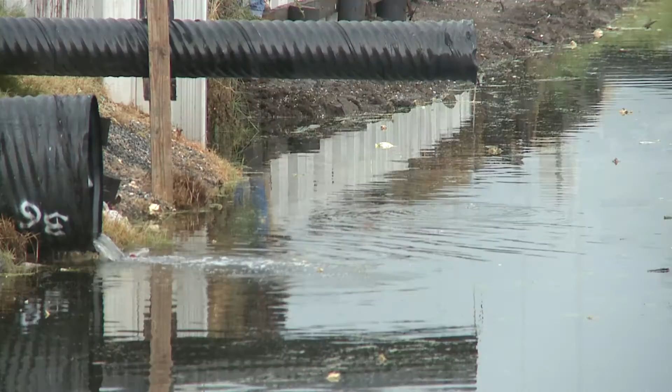This video is intended to give voters a brief history of how the 1-cent sales tax has been beneficial to Jefferson Parish over the years, how it's allowed for capital improvement projects throughout the parish, and how it's helped fund the sheriff's office. It will also take you through the projects that are proposed and have been unanimously approved by vote of the parish council if the initiative passes on December 10th.

Again, this is not a new tax, but an extension of an existing tax for 20 years. The 1-cent sales tax is authorized on the sale of retail and services. It is not applicable to food purchases or medical expenses. 1/8 is dedicated to the sheriff's office. The remaining 7/8 is dedicated to roadwork, drainage, and sewerage projects.

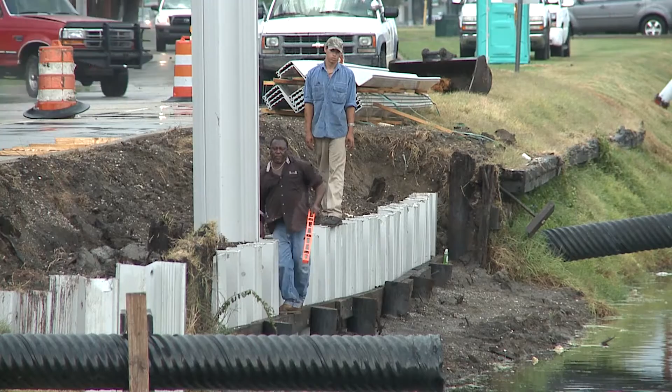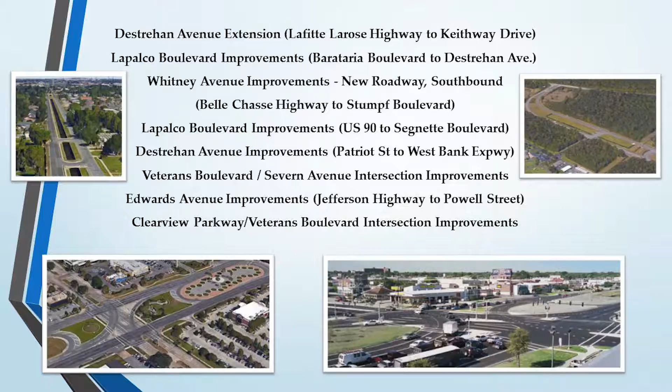The parish undertook a similar course of action in 1998, bonding the parish's sales tax percentage to generate $260 million, which was supplemented by approximately $35 million of state and federal funds. This helped complete the construction of 89 roadway and drainage improvement projects that have significantly improved traffic flow and reduced flooding parish-wide.

You're probably very familiar with many of the projects from the 1998 renewal seen here, which have added value to Jefferson Parish. The proposed 2016 Road Bond Initiative will allow the parish to improve access to businesses, shopping, and recreational facilities. The parish will maximize the $190 million in bond funds by supplementing it with approximately $106 million in state and federal funds. The remainder of this video will take you through these projects, which have been unanimously approved by vote of the parish council.

As one of only 3 north-south highways that extend from the lake to the river, Causeway Boulevard handles approximately 62,000 vehicles every day. As part of the bond program, an interchange with Earhart Boulevard on the west side of Causeway will be undertaken, providing improved access to and from Elmwood and the Huey P. Long Bridge. In addition, major rehabilitation of the existing Airline Drive overpass, including the traffic circle, will be undertaken to extend the life of this aging structure.

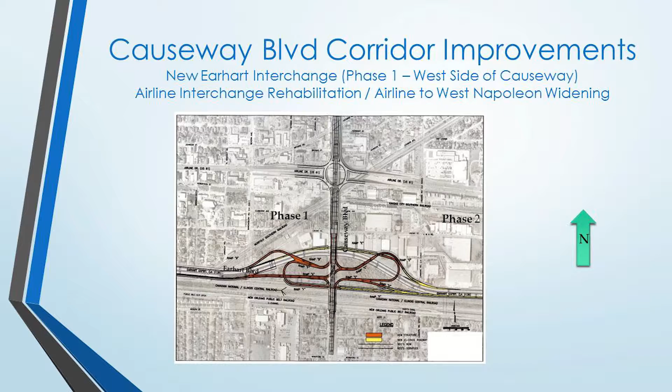Causeway Boulevard will also be widened from 4 to 6 lanes between Airline Drive and West Napoleon Avenue to reduce congestion and travel time delays.

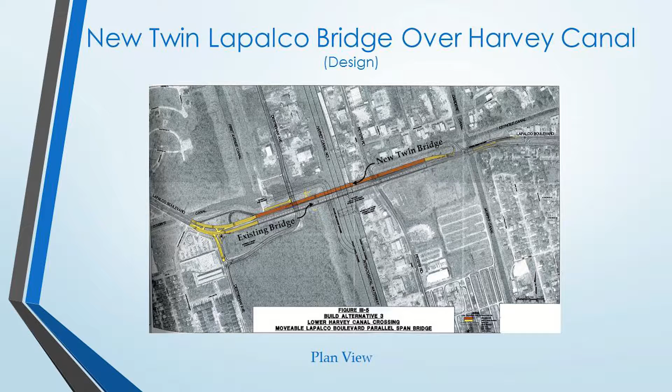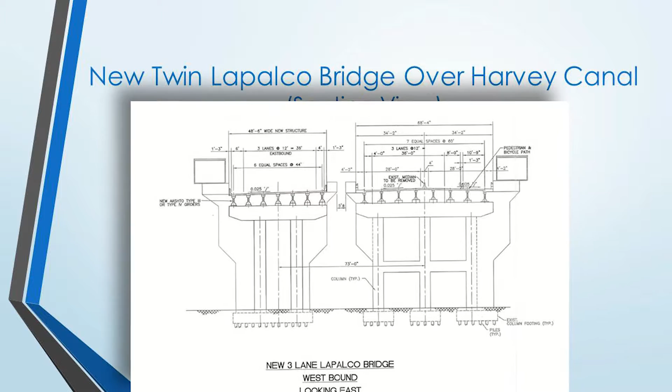Currently, Lapalco Boulevard carries 39,000 vehicles per day and is choked down from 6 lanes to 4 lanes at the Harvey Canal Bridge. A new twin bridge located immediately north of the existing bridge will be designed under the bond program. This major improvement will provide 3 westbound traffic lanes, and the existing bridge will be converted to 3 eastbound lanes with a much-needed 10-foot wide shared use path for pedestrians and bicyclists to safely cross the canal.

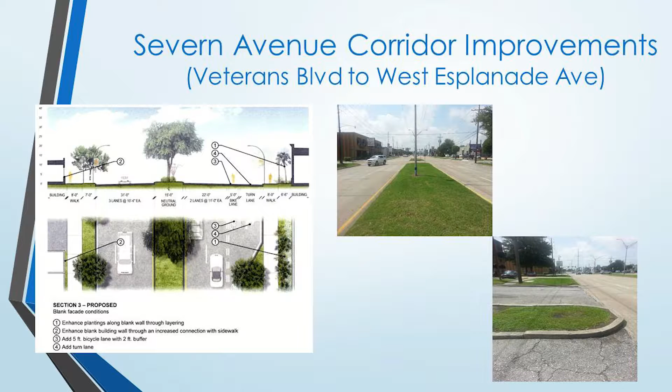Severn Avenue is the gateway to Fat City and the largest retail shopping complex in Louisiana, Lakeside Mall. Improvements between Veterans Boulevard and West Esplanade will include new, wider decorative sidewalks, pedestrian lighting, landscaping, and a bike lane to connect Fat City to Lake Pontchartrain. In addition, several pocket parks will be constructed, providing areas along the corridor for shoppers to relax and enjoy the surroundings. This will attract more people to the area and continue the positive redevelopment of Fat City.

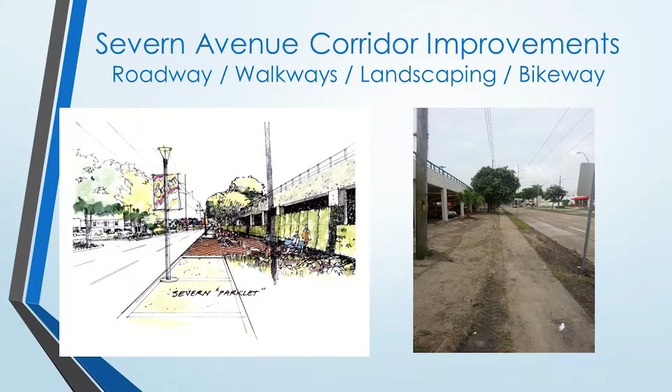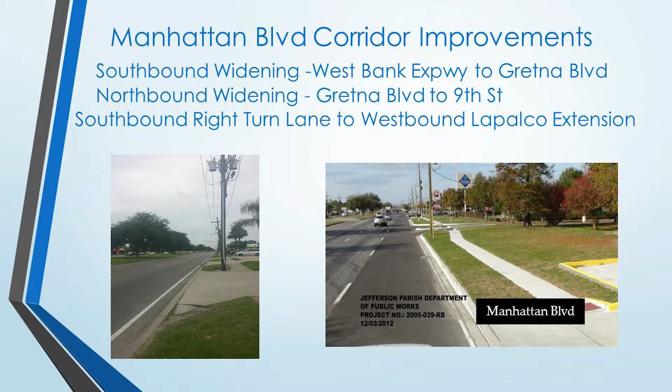Manhattan Boulevard is the most traveled north-south roadway on the west bank of Jefferson Parish, servicing 43,000 vehicles per day. The corridor continues to grow with new businesses. To reduce traffic congestion and accommodate projected traffic increases, widening from 2 to 3 lanes southbound will take place from the West Bank Expressway to Gretna Boulevard. This will match the recently completed northbound widening. In addition, northbound widening from 2 to 3 lanes will continue from Gretna Boulevard to 9th Street.

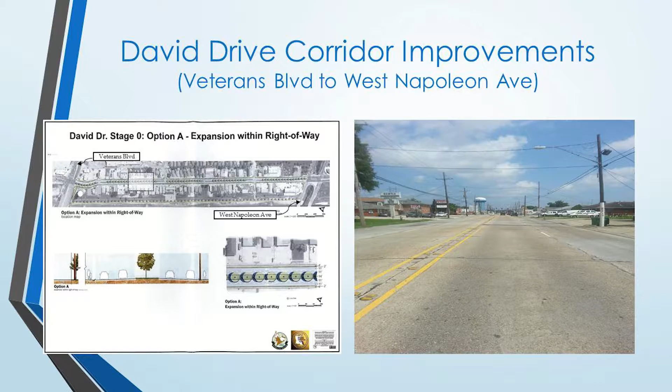The David Drive Business and Retail Corridor from Veterans Boulevard to West Napoleon Avenue will be widened to provide a landscaped median with decorative lighting to both improve traffic flow and make the area more attractive for economic development.

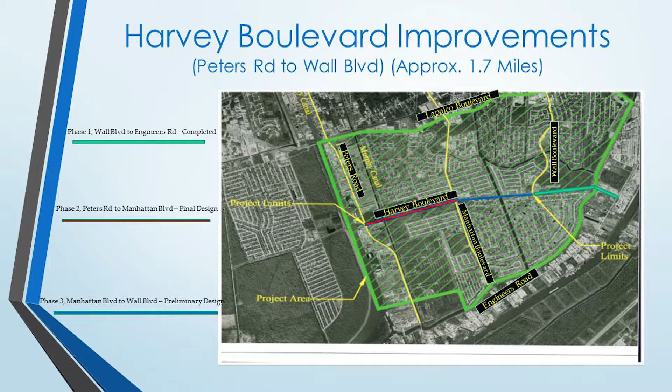Tying to the recently completed Harvey Boulevard connection between Wall Boulevard and Engineers Road, roadway improvements will be extended to Peters Road, providing an alternative east-west route, helping to alleviate traffic congestion on Lapalco Boulevard. The connection will be a 4-lane divided roadway linking the Harvey Canal Industrial Corridor to Plaquemines Parish.

In addition, commuters will be able to access the West Bank Expressway via the Peters Road connection, avoiding the congestion on Manhattan Boulevard. Sidewalk, landscaping, and parking improvements on Metairie Road at Severn Avenue will supplement the overall Metairie Road

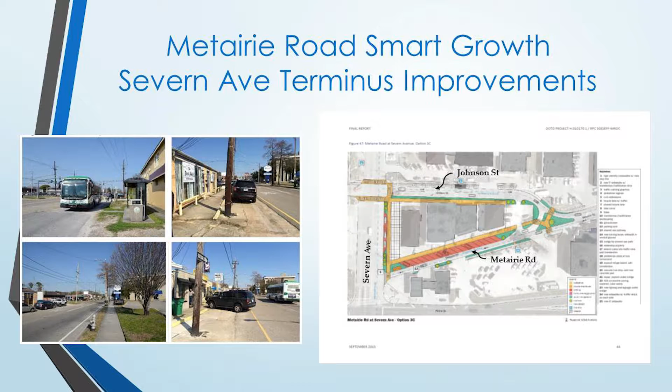Smart Growth Plan, which was developed to sustain the economic viability of the Metairie Road corridor. Similar to this project, the area under the Causeway Overpass will be rebuilt to improve pedestrian mobility and attract visitors and nearby residents to the area.

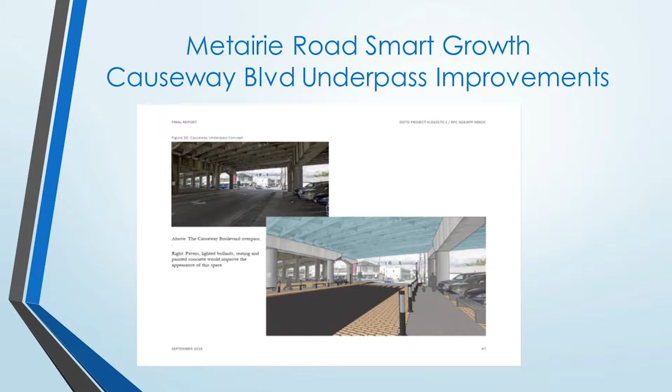As part of the Oakwood Area's Smart Growth Plan, improvements will be made to pedestrian and bicycle access to the Oakwood Mall and surrounding areas.

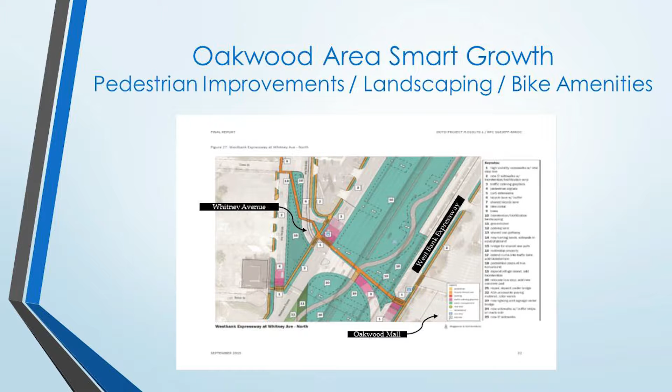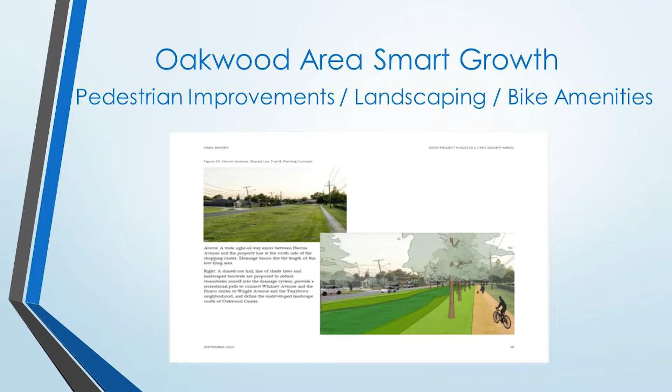In order to provide safe connectivity across the West Bank Expressway and Whitney Avenue, new decorative paved sidewalks and a shared use path will link residential neighborhoods on both sides of the expressway and visitors at the area hotels to the mall. Additional landscaping and bike lanes will provide recreational opportunities and encourage trips to the surrounding businesses.

In order to improve traffic flow servicing the Elmwood Industrial Park, roadway improvements will be made along Citrus Road from Dickory Avenue to Elmwood Parkway.

Also, the addition of on and off ramps to and from the Earhart Expressway at Lead Street will significantly reduce the large truck traffic traveling through the congested Citrus Road corridor. This will help by providing direct truck access to the Illinois Central Rail Yard and Coca-Cola bottling plant.

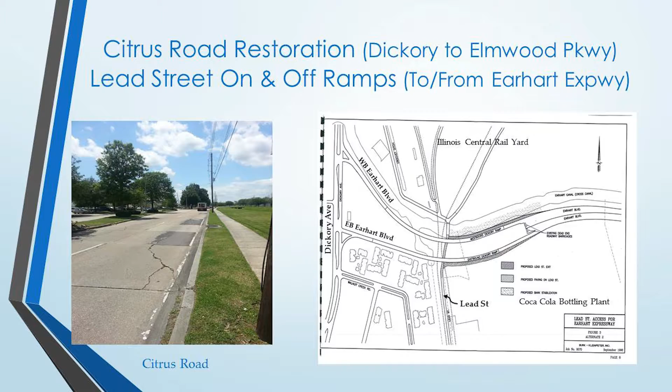Westwood Drive, a heavily traveled 4-lane connector between Lapalco Boulevard and the West Bank Expressway, will be rehabilitated with subsurface drainage improvements. In addition, new sidewalks will be constructed to improve mobility for residents.

Also included in the roadway projects are bike path improvements and new developments, an ever-growing and much desired amenity that improves the quality of life in thriving communities.

On the East Bank, the parish will undertake an ambitious plan to connect the existing Mississippi River levee bike path that extends from New Orleans to St. Charles Parish to the existing 10.8-mile-long Lake Pontchartrain bike path.

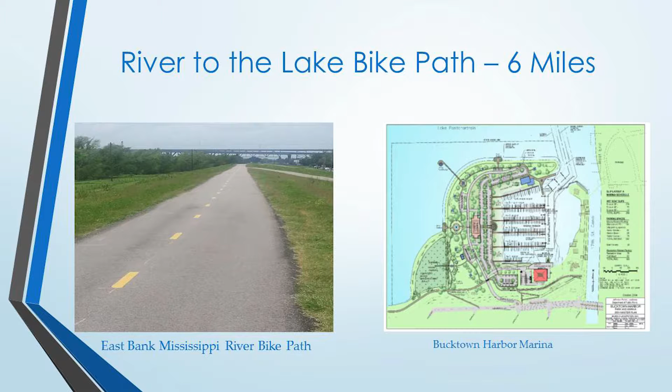This will allow more residents to enjoy the recreational facilities at the Bucktown Harbor Marina, the Bonneville Boat Launch, and the Kenner Boat Launch. The completed path will be constructed adjacent to the 17th Street Canal, which runs along the Orleans Parish line. Aerial crossings would be provided over Veterans Boulevard, Airline Drive, and the New Orleans Public Belt Railroad.

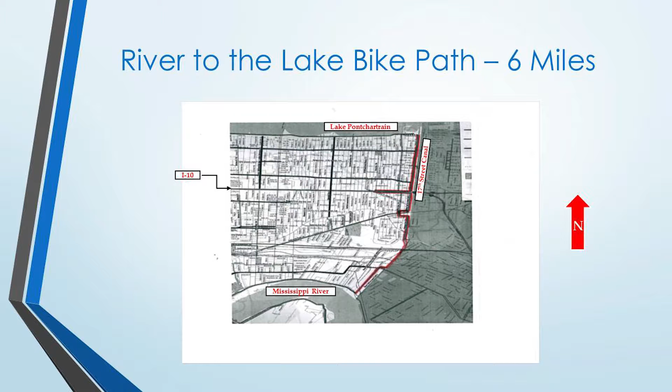On the West Bank, another plan will connect the West Bank Mississippi River levee bike path that extends into St. Charles Parish to the parish's newest recreational facility, Parc des Familles.

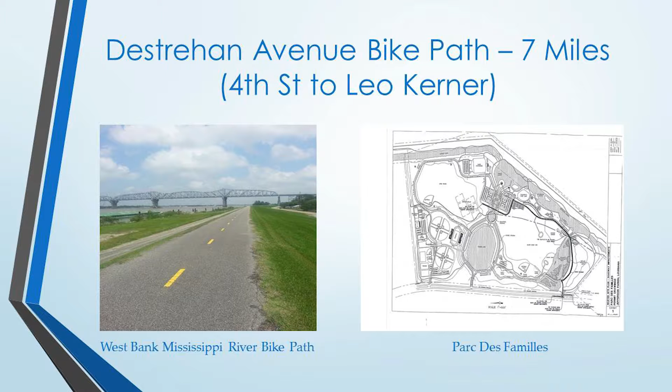The completed path will cover 7 miles along Destrehan Avenue, beginning at 4th Street and stretching south to Leo Kerner Parkway, where it will connect to another proposed path along Leo Kerner Parkway that continues to Parc des Familles.

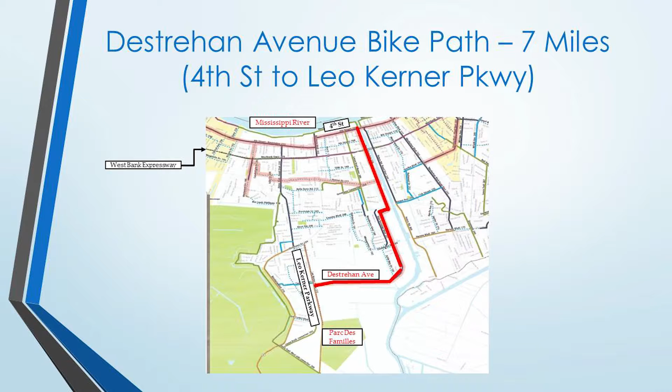As we've previously mentioned, improvements to our sewer system are also included in the sales tax renewal projects. Jefferson Parish currently has 6 wastewater plants that treat on average 57 million gallons of sewage per day. Peak flows during wet weather can be as high as 300 million gallons per day.

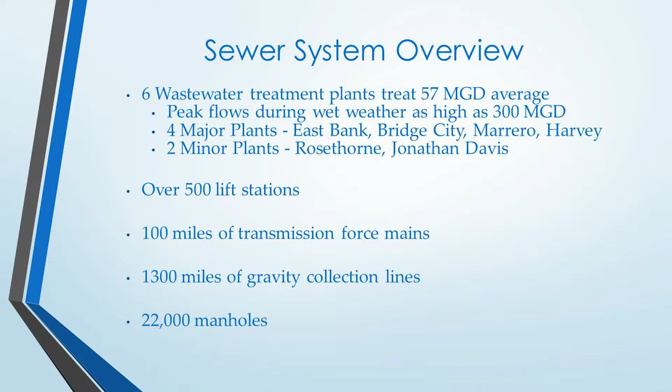We have 4 major plants serving the East Bank, Bridge City, Marrero, and Harvey, and 2 minor plants serving the town of Jean Lafitte and Barataria. The parish maintains over 500 lift stations, 22,000 manholes, 100 miles of transmission force mains, and 1,300 miles of gravity collection lines, enough to reach from here to New York.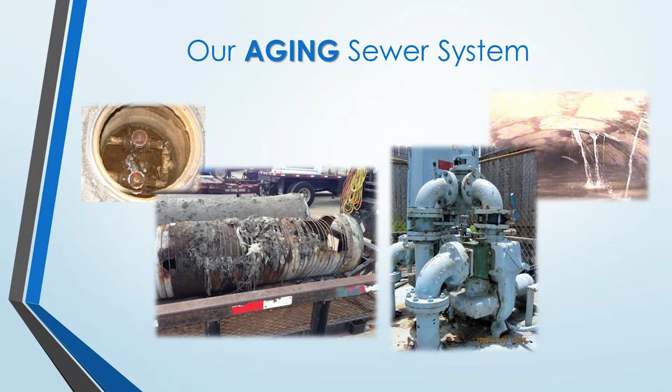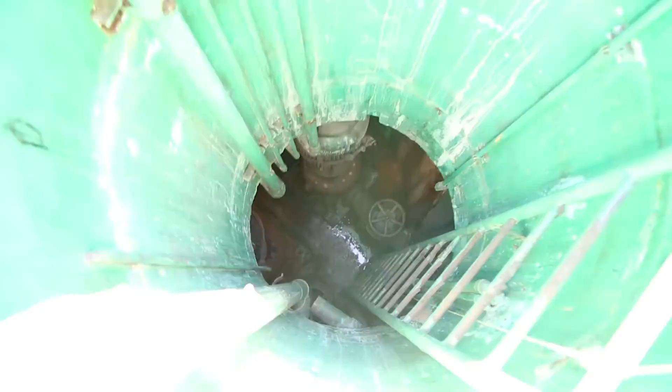Our lift stations are approaching the end of their design life. Pumps and motors are wearing out, electrical components are antiquated and require upgrades. Piping, valves, and wet wells are deteriorating. Additional problems include broken, cracked, and collapsed gravity lines.

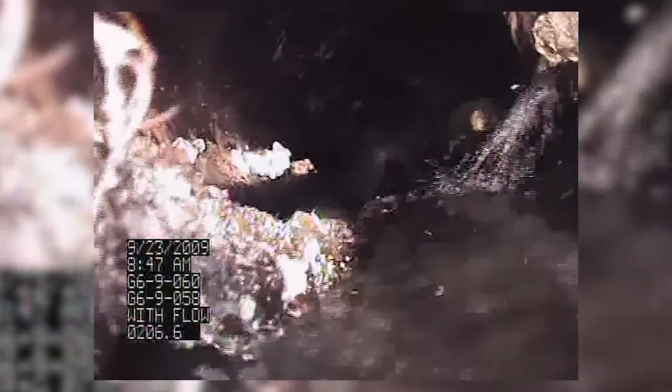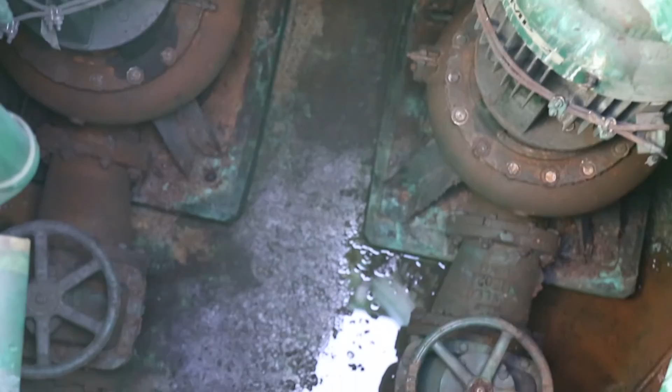Inflow and infiltration, commonly referred to as I&I, is also a problem. This occurs when clean storm and or groundwater enters and overwhelms the sewer system through cracked pipes, leaky manholes, or improperly connected storm drains, downspouts, and sump pumps. During heavy and abundant rainfalls, I&I causes overflows into the environment and backups into homes.

In addition, improper maintenance of grease traps can cause fat, oil, and grease to solidify in sewer pipes, causing blockages which can lead to overflows and backups. These maintenance and improvement factors are not the only things to consider.

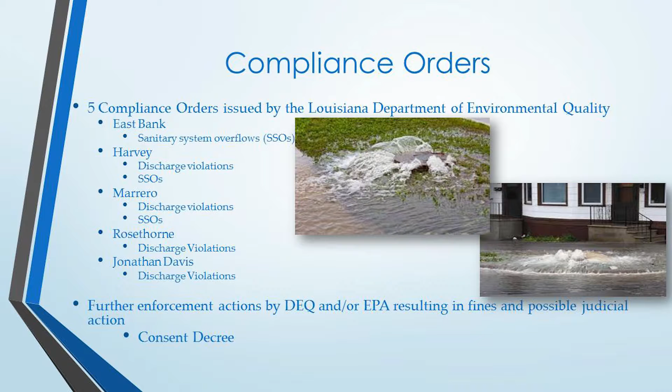As some of these issues have gone ignored, Jefferson Parish currently finds itself subject to 5 compliance orders issued by the Louisiana Department of Environmental Quality. If the conditions of our compliance orders are not met, further enforcement actions by LDEQ and EPA may result in significant fines and possible judicial action leading to a consent decree.

Factors such as these are why the proposed 2016 Sewer Bond Initiative is so important. The projects proposed will provide for design and construction of 67 sewer improvement projects focused on reducing backups and overflows, in addition to meeting our compliance requirements.

The parish will maximize the $128 million in bond funds by supplementing it with approximately $1.3 million of matching state and federal funds. We can also take advantage of low-interest loans available through state revolving loan funds for wastewater and energy efficiency. So let's take a quick look at a few of the proposed sewer bond projects.

The Harvey and Marrero treatment plants have been undergoing major improvements over the last few years, but additional work is necessary to ensure sufficient wastewater treatment and provide reliable service for our community. Electrical and process upgrades will be undertaken. A new safe room admin building to house employees during tropical events will allow us to provide continued sewer service through and immediately following storms.

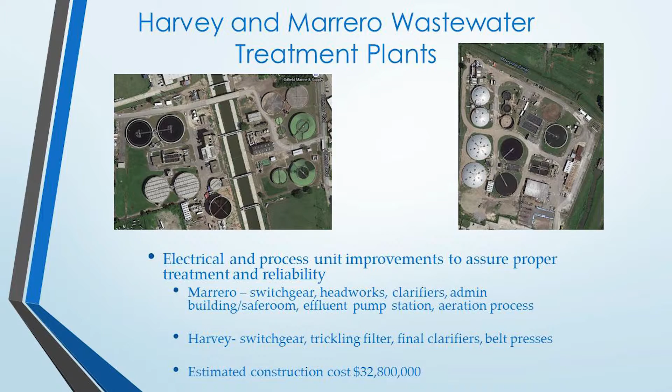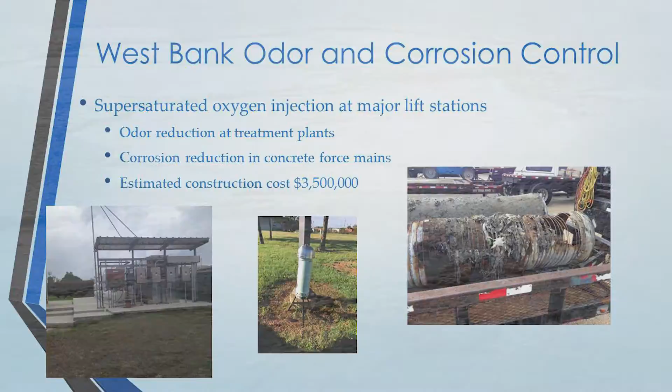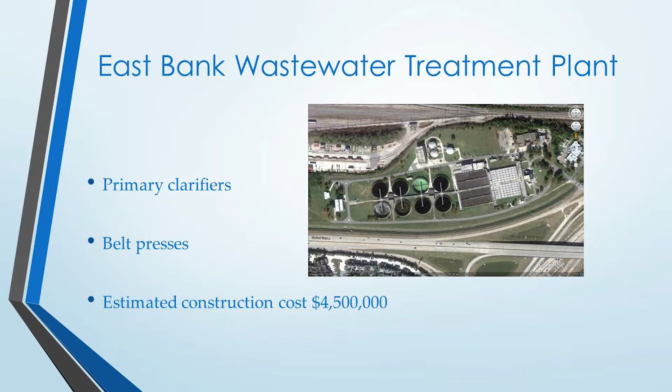The introduction of oxygen into wastewater flow prevents the growth of bacteria that causes corrosion in force mains and produces odor at the treatment plant. This oxygen injection project has proven successful on the East Bank and will be expanded to the West Bank. Upgrades to process facilities at the East Bank treatment plant are necessary to maintain our current compliance record.

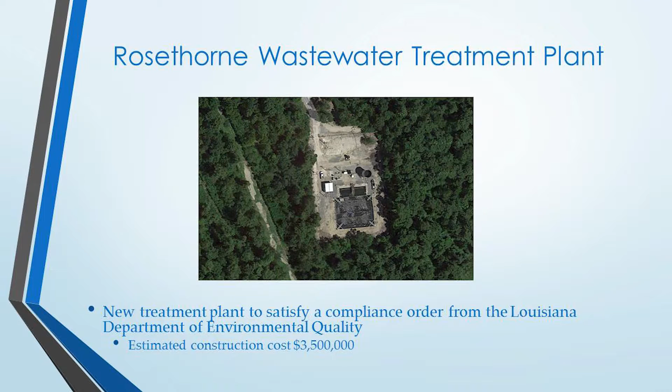Construction of a new treatment plant to serve the town of Jean Lafitte will satisfy our compliance order and ensure continued sewer service during and following tropical events.

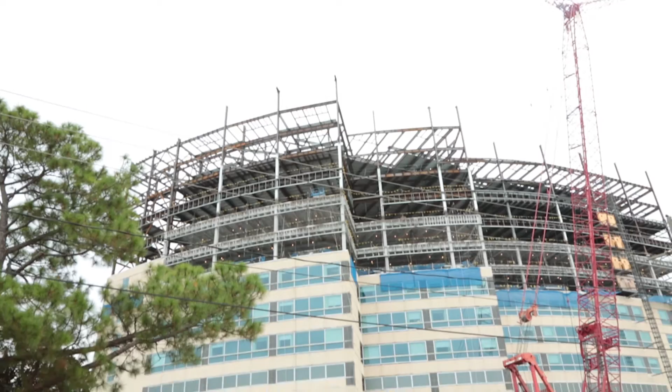A number of our lift stations are reaching the end of their design life and need to be either rehabilitated or replaced. The old Jefferson lift station is in poor condition and requires frequent and costly maintenance. The pumping capacity of the station will also need to be increased to accommodate the additional flow from the Ochsner Hospital expansion and the expected revitalization of the area.

The MLK Playground lift station is outdated and experiences frequent mechanical and electrical failures. It is currently located immediately adjacent to the soccer field. So in addition to capacity increases, relocation of the station will allow more flexibility for the playground and provide further protection for the residents using that facility.

Supervisory control and data acquisition equipment, commonly referred to as SCADA, will be installed at all lift stations. This will allow sewerage department staff to remotely monitor performance of our lift stations, be notified by text or email of any problems, control the lift stations remotely, perform predictive maintenance, and most importantly, detect and solve potential failures before an overflow occurs.

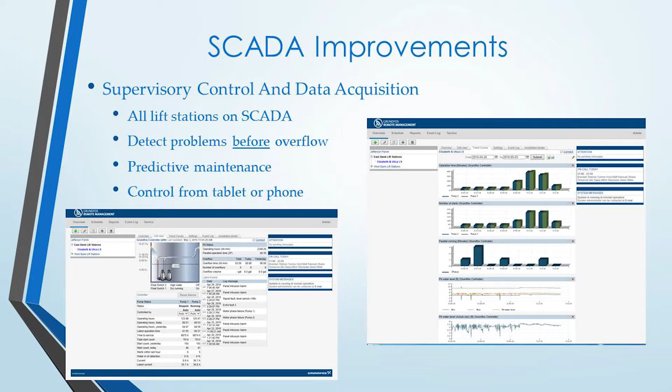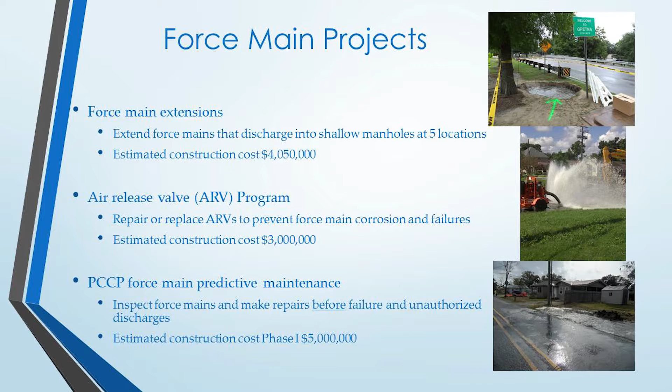At this time, several of our force mains discharge into shallow manholes, which can cause overflows during wet weather. Extending those force mains to the downstream lift station or to a deeper manhole will resolve these problems.

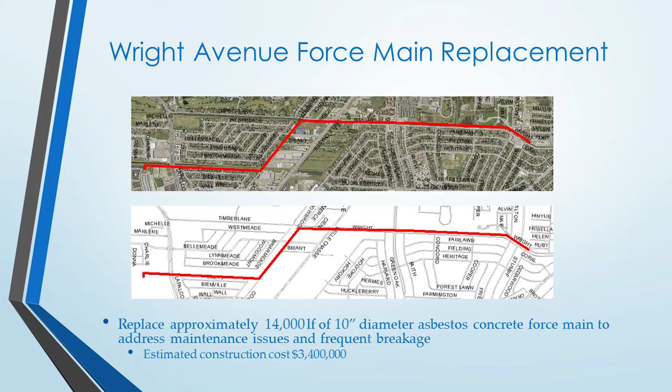The Wright Avenue force main is in very poor condition and experiences failures approximately twice per month. Replacement is essential. A new gravity line along Peters Road would go far to encourage economic development in the area. Gravity system repairs will help to alleviate I&I problems, and interconnections by gravity lines between lift station areas will also help to alleviate overflows.

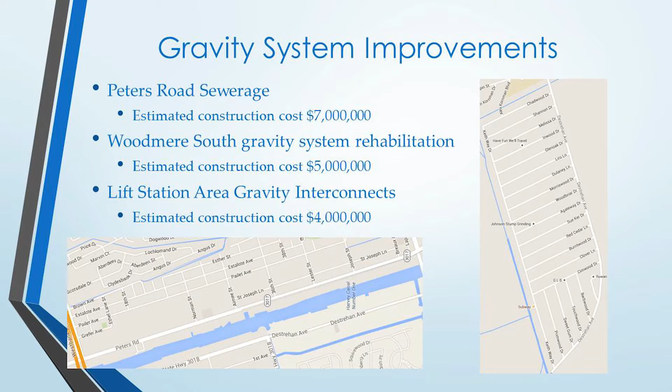The Jefferson Parish sewer system is in crisis. The parish has been cited by our enforcement authority, and we must act now to correct the deficiencies or face further reprimand. Currently, during wet weather, the system experiences backups into homes, overflows from lift stations, and many of our residents are unable to use their facilities.

Failure to act will allow these conditions to continue or worsen, risking exposure to sewage for our residents and negatively impacting the quality of life in Jefferson Parish. The renewal of the 7/8 cent sales tax, which will provide the funds to complete these projects, is critical.

The Road and Sewer Bond Initiative will provide financing for vital infrastructure improvements and maintenance that will encourage new businesses to locate in Jefferson Parish, enabling existing businesses to expand and enhance the quality of life for all parish residents.